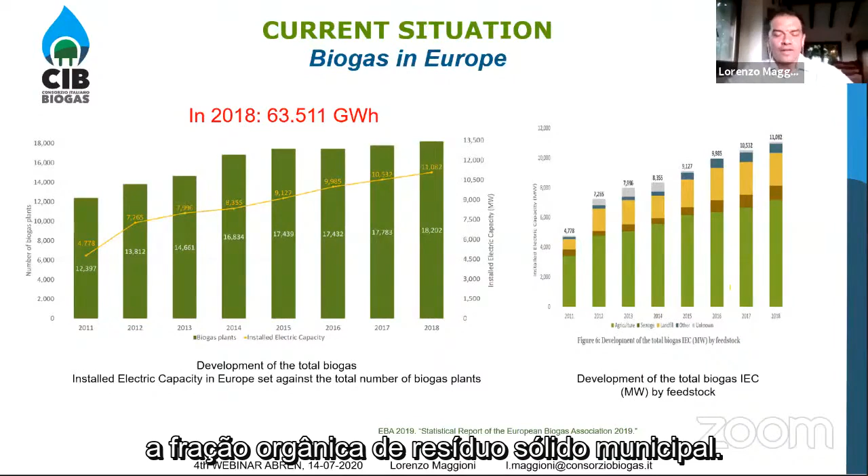First of all, I want to give you some numbers about biogas and biomethane in Europe, and after, I will focus my presentation on the situation we have in Italy. In Europe, at the end of 2018, we had more than 18,000 biogas plants with an electric installed power of more than 11,000 megawatt. The total production in 2018 was 63,500 gigawatt hours. In order to produce this huge amount of renewable electricity, we use agricultural residues, and around 70% of the total production of biogas is made thanks to this feedstock, agricultural residues and energy crops. The second most used feedstock is the organic fraction of municipal solid waste.

For biomethane production, exactly as is happening for electric energy production, we are using most of all agricultural residues. In this case, it is forbidden, it is not possible to use energy crops. In order to produce biomethane in Europe, you need to use only agricultural residues, agricultural byproducts. It is also possible to use the organic fraction of municipal solid waste.

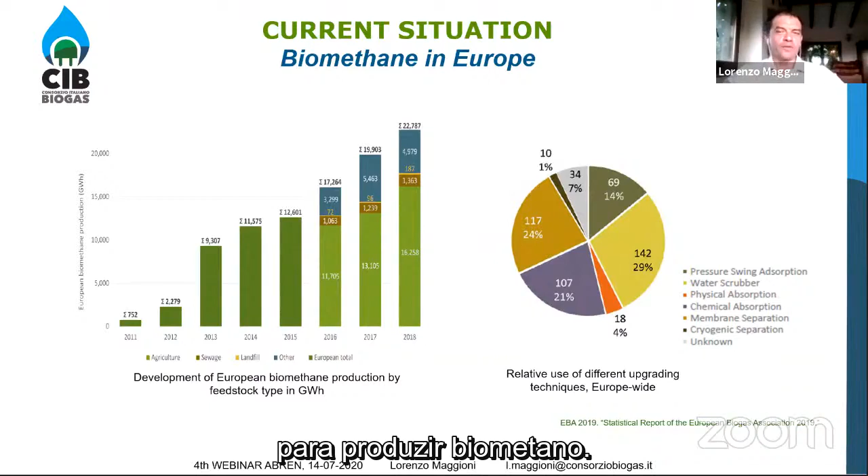So for the moment, we have not a best technology. It's possible to use all the technologies to produce biomethane. Now I want to start to talk about biogas and biomethane in Italy. Italy is the second market after Germany. We invested a lot of money, more than 4 billion euro in the last 6 years.

We have more than 1,800 biogas plants with a total installed electric power of more than 1,300 megawatts. It's an equivalent of 3 billion cubic meters of biomethane per year. Thanks to the biogas sector, it's important to stress that we created also a lot of green jobs. We estimate around 12,000 green jobs.

Talking about biomethane, now I want to explain what is happening in our country. For the moment, in Italy, we have no more subsidies for the production of electricity. In September, and only for a few months, we will have the opportunity to submit new projects, around 100 new projects.

We are waiting for a new decree that will allow us to start again with renewable electricity production thanks to biogas. So in September, we will have the opportunity to build only small plants with a maximum size of 300 kilowatts, and only fed by manure from cows, from pigs, and from other animals, adding a small quantity of other byproducts. But the total amount of these new biogas plants will be very, very small.

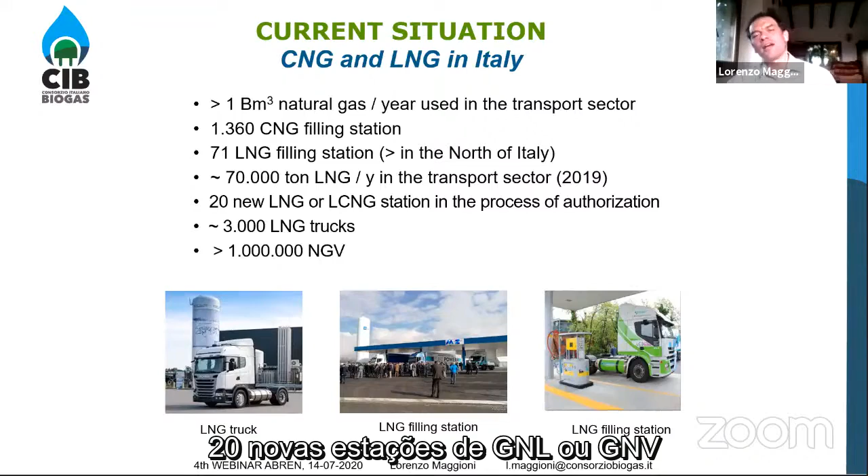We have around 1,360 CNG filling stations and 71 LNG filling stations. But 20 new LNG or LCNG stations are in the process of authorization. So what about biomethane? In March 2018, our Italian government published a really interesting law that introduced subsidies for the production of biomethane. The maximum biomethane production with subsidies will be 1.1 billion cubic meters per year.

And it's important to stress that in order to achieve these subsidies, you have to demonstrate that the total amount of biomethane you produce is used in the transport sector. How is it possible? You can show it by injecting biomethane into the natural gas grid, and then, thanks to a mass balance process, it's possible to transport the biomethane in a virtual way all over Italy and to sell it in the existing CNG filling stations. It's possible to compress the biomethane, transport it by trucks and sell it in filling stations, or it's possible to liquefy the biomethane and sell it in LNG filling stations.

The Italian government gives you really interesting subsidies in case you build a new filling station. You receive 0.6 million euro for each new filling station you build, and you receive 1.2 million euro for each liquefaction unit you build. It's possible to add these two different subsidies together. So in case you build a new filling station and a new liquefaction unit, you receive 1.8 million euro. And in addition, you will also receive the subsidies for the biomethane production.

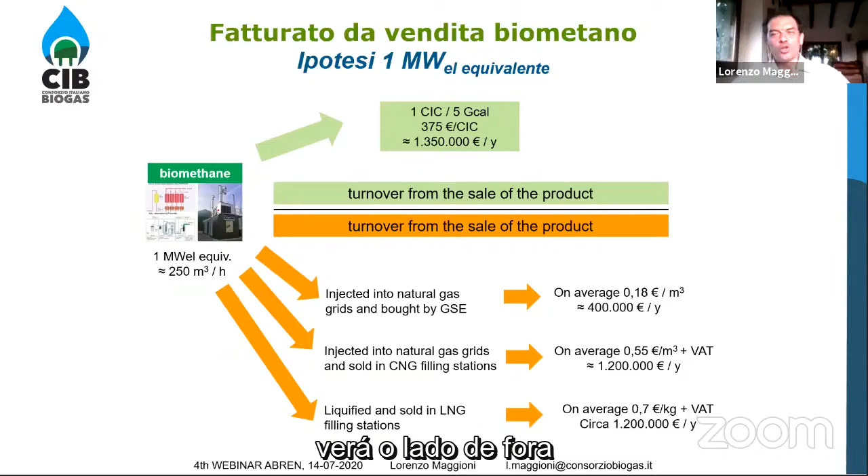So the total turnover per year will be a minimum of 1.7, 1.8 million euro to a maximum of 2.5 million euro in case you sell your production directly to the final customer. And it sounds really, really interesting. And remember that this example is linked to a plant with the size of 1 megawatt equivalent. But in the next slide, you will see the average size is really bigger in our country.

The biggest plant is a plant with a size of 3,750 cubic meters per hour, but really they are doubling the capacity, and I think Mr. Moretti has already doubled it. Yes, I think Mr. Moretti will explain something more because his company built this upgrading plant. Also, other plants have a very large size. There are other plants with 2,000, 3,000 cubic meters per hour, and we have, unfortunately, for the moment, only 2 plants fed by agricultural byproducts.

One based in Emilia-Romagna region is a company named Caviro, that is the largest Italian producer of wine. So they have a 2,000 cubic meter per hour plant, and another plant is based in Lombardy region with a size around 600 cubic meters per hour. It's really important to stress also that in some of these plants, they are not only producing biomethane, but they are also producing carbon dioxide. In the largest plant in Montello, they are producing a very huge amount of carbon dioxide. But Mr. Moretti will explain better.

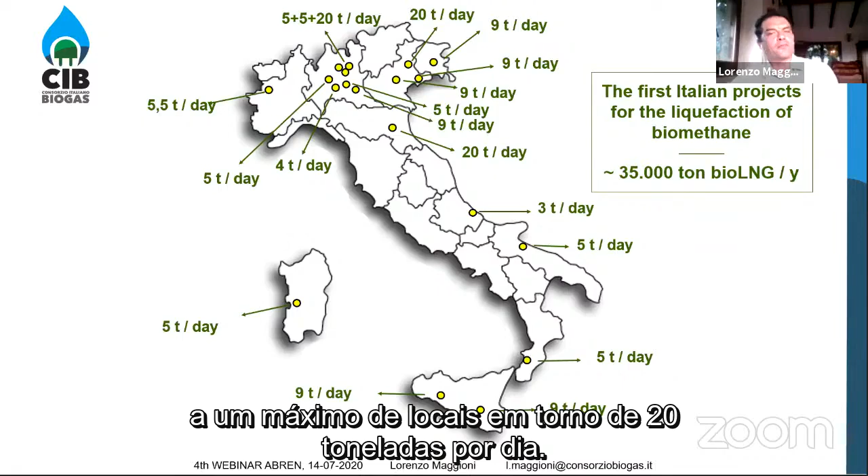Now I have the last 4 or 5 slides. One case study. Cooperativa Speranza is agricultural, it is 5 farmers that are working together, so it's a cooperative. They own 2 existing biogas plants, each one with the size of 1 megawatt electric. They are starting to produce the first Italian kilogram of bio-LNG. They will use 100% agricultural byproducts. They will produce 5.5 tons per day of bio-LNG.

It's interesting to show also that they are producing a lot of heat and they are selling the heat to a cancer research institute. So using the heat coming from the biogas plant, the research institute spends less money and creates less air pollution.

How will they use the bioenergy? They signed an agreement with a company whose name is Maganetti. Maganetti SPA is the owner of a large fleet of trucks. They have already bought 42 LNG trucks. So the Maganetti company will start to use 100% bio-LNG in their LNG heavy truck fleet.

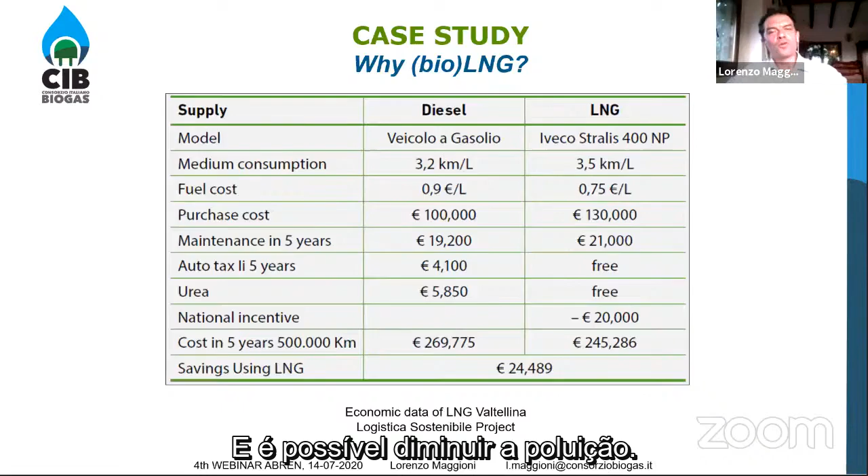In the next 2 slides, I will explain why they decided to use LNG and not more diesel. Using LNG, it's possible to save money, around 5,000 euros per truck every year, and to decrease pollution. In case you use fossil LNG, you decrease carbon dioxide emissions by 15%. When they start to use bio-LNG, the percentage will increase a lot - it will be possible to demonstrate a decrease of more than 90%.

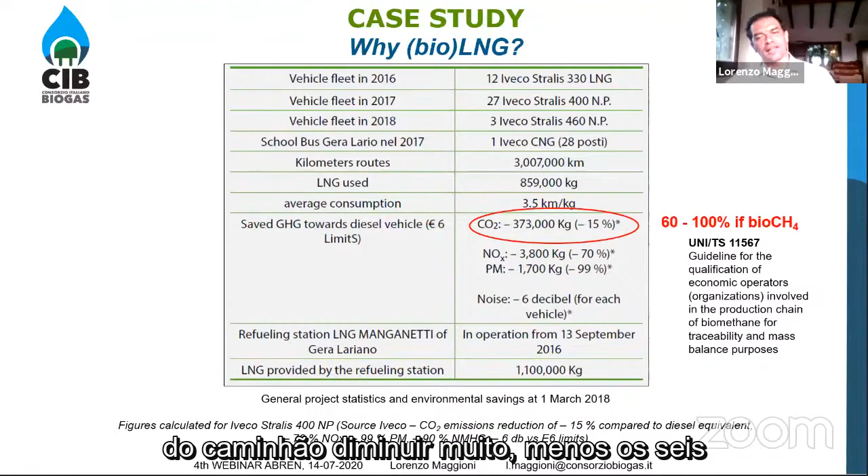Using LNG or bio-LNG, it's also possible to decrease a lot the quantity of NOx in the atmosphere, by less than 70%, and particulate matter by less than 99%. Also the noise of the truck decreases a lot, by less than 6 decibels for each vehicle.

This is the alarm that is saying I have to stop my presentation. Sorry, but I have the last slide.

Thank you for your attention, and obviously at the end of the presentation I will answer your questions.

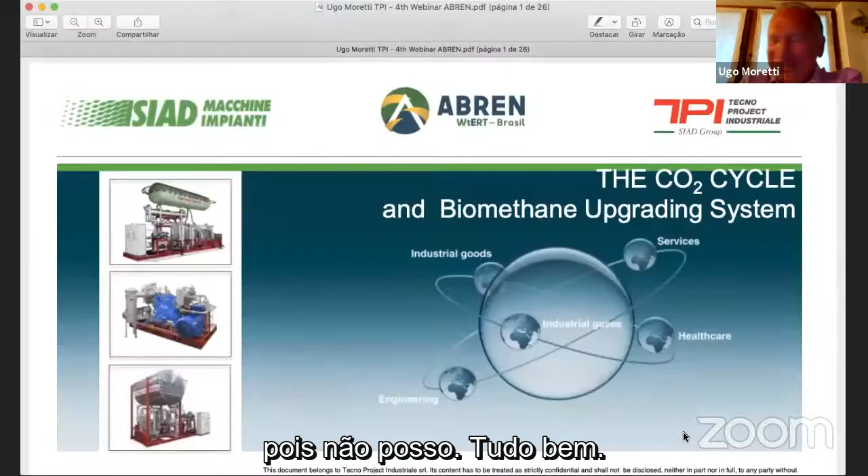Our company is not coming from the biogas field, but is a gas company specialized for 40 years in purification and production of CO2, and the separation of CO2 from any kind of mixture, including, of course, biogas in recent years. Therefore, we don't start from technology like other colleagues from biogas technology, but from gas treatment technology. We also belong to a company which is a major producer of gas in Italy. Therefore, we use this company for testing our technology on CO2 and its applications.

Even if our experience in CO2 extraction is mostly based on traditional solvents, such as amine or hot potassium carbonate, we decided to move to membrane mainly, and still amine, after having selected all the technologies for gas separation and gas purification. We know PSA from our hydrogen plants, oxygen plants, and nitrogen plants, as well as membrane technology that we have used since ever for nitrogen production. Therefore, looking at all the technologies, we really decided to choose only two technologies.

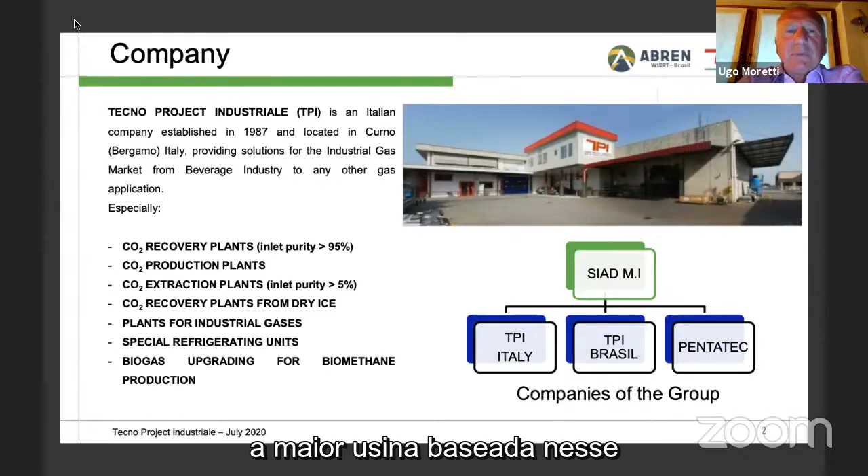This allows us to recover CO2, as we did in the largest plant we have for organic waste biogas treatment, which is the most difficult due to impurities. We installed the largest plant based on that system in Montello, which is actually producing 4,500 cubic meters per hour of biomethane.

Last week, the first of the next 3 lines was started, up to a total amount equivalent to the actual one. Therefore, within a couple of weeks, it will produce 9,000 cubic meters per hour of biomethane and more or less 10 tons per hour of CO2, food grade. The actual plant has produced, in the last 2 years, 40,000 tons per year of food grade CO2.

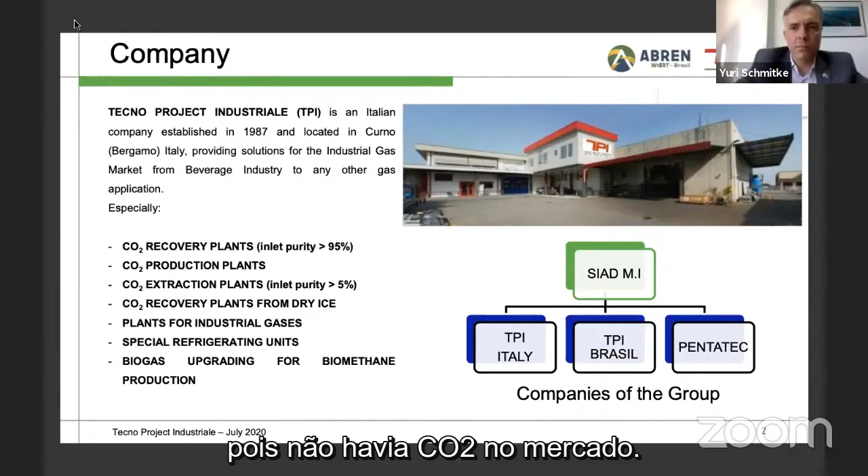That has solved the problem of lack of CO2 in Italy and also in all of Europe in the last 2 years, where there was a shortage of CO2. Last year, 2 breweries in England closed because there was no CO2 on the market. It's incredible, but now this is one of the main sources.

Therefore, we have the advantage of using our CO2 recovery plant to also recover the last methane contained in the off-gas. Normally, the 3-stage membrane system has the advantage that you can regulate the percentage of CO2 in the methane to be injected into the grid or sent to LNG or CNG. With this technology, we can easily recover the CO2 because the residual methane can be separated in our plant.

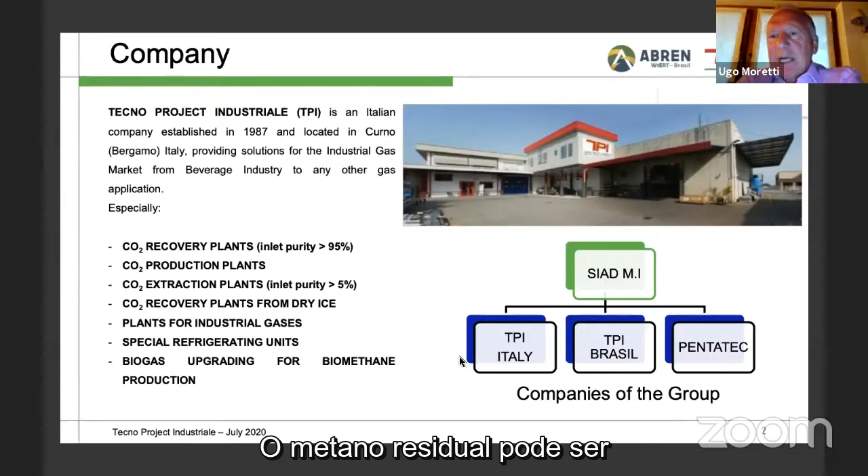Thanks to that, now the Regione Emilia is imposing, for biogas from organic waste, the installation of a CO2 recovery system as well, since methane has a greenhouse effect 20 times greater than CO2. In this way, we totally reduce any emission of methane because we recover it in the CO2 purification process and send it back to the system. Therefore, we do not discharge any methane.

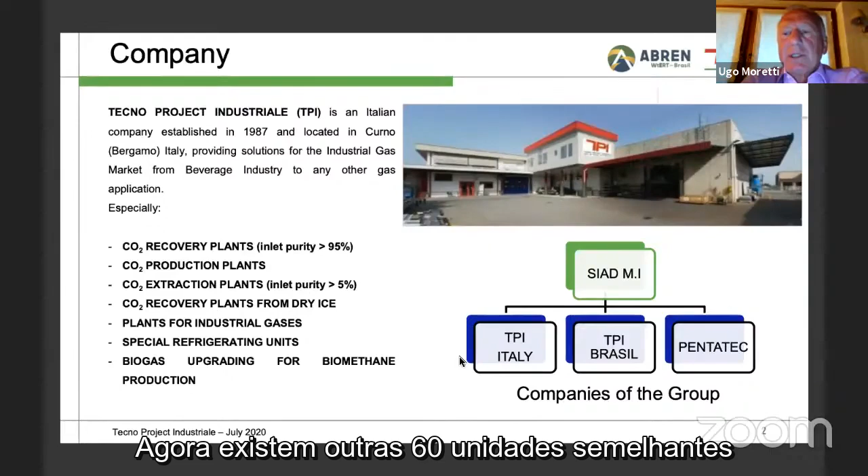This is what is happening in the huge plant in Montello, which is the largest in the world, actually. Now there are other 60 units in a similar installation by a company called SESA, SESA and Biomethan, that has, each one, a capacity equal in total to Montello. That means 15,000 cubic meters per hour of biogas treated, which is the largest, but spread across 2 separate sites, not in the same plant like in Montello.

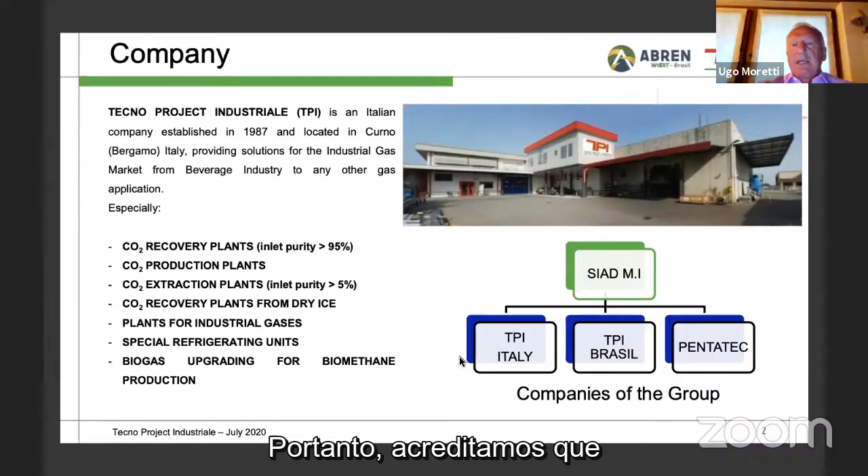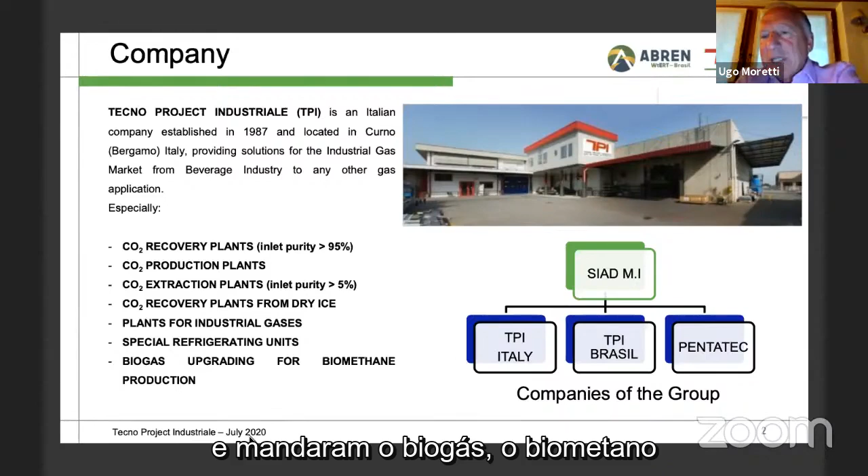We believe that even though in Morocco we installed just the first biogas plant based on membrane technology, at Delta Holding, a company that makes sugar, they installed the biogas upgrading plant based on amine just to produce CO2, not methane. They sent the biomethane to the boiler again, but we recover CO2 from their main production plus from purification of the biogas. These are the applications we are working on now.

In addition, the quality of the CO2 that we obtain is absolutely food grade, complying with EIGA, which is the guideline also used for Coca-Cola, and according to E290, the Italian rule for food grade, as well as halal certification. All of this has been approved for all the applications of the CO2 we recover.

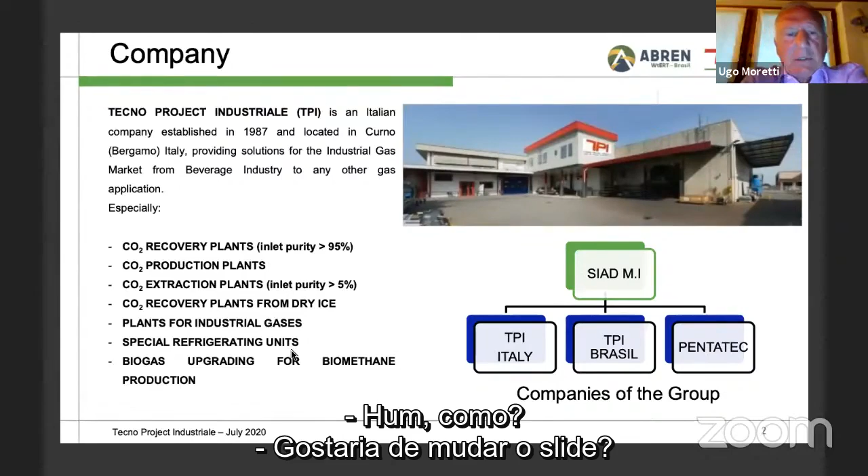Mr. Ugo, you want to change the slide? Yes, of course. Go. This is just the application of biogas. Go. Yes, this is mainly on breweries. Okay, go. CO2. Okay.

These are only the breweries, in the breweries, where there is also biogas present, but we have not yet applied, we're not yet convinced to recover biomethane from the biogas that is present in all the breweries. In InBev, in Grupo Modelo, we just collect and pre-purify, but we don't produce biomethane.

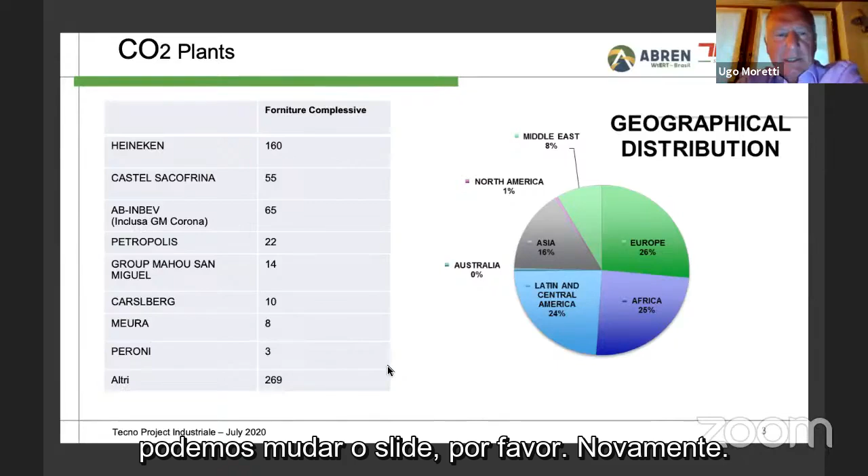Then we can change the slide, please. Again, go.

This will allow us to avoid this, because it seems strange, but 100,000 tons per year are extracted from underground in Italy for the market, only for the Italian market.

In Europe, there are several CO2 recovery plants from deep wells just to feed the market that can be absolutely satisfied by the biogas, by purification, as a byproduct of biomethane. CO2 can be recovered everywhere very easily. Of course, with the technology, with amine or potassium carbonate or membrane, CO2 can be easily recovered and close the absurd recovery from underground.

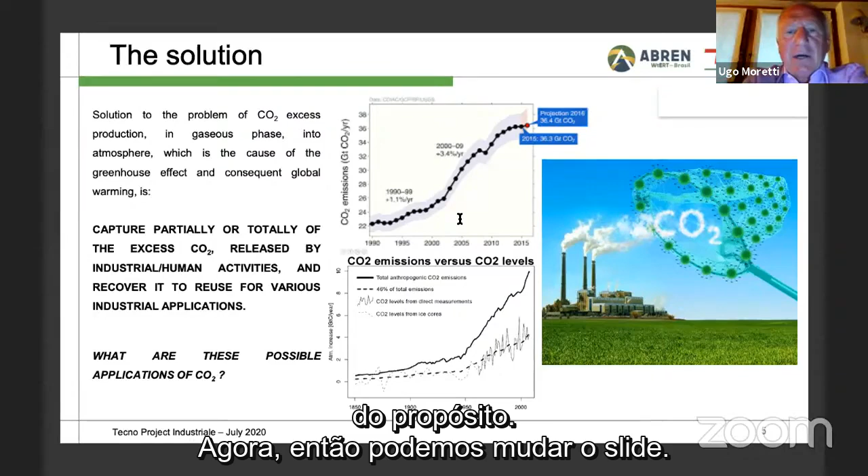Then we can go. We are talking mostly about CO2. Now, what do we do with all this CO2? There are so many applications. These are one of the several applications.

Several applications. One is dry ice, in the United States is well used for cooling, also for fish cooling, and CO2 is freezing and also bacteriostatic. Therefore it's the best for conservation at low temperature of foods. As liquid it is cold energy.

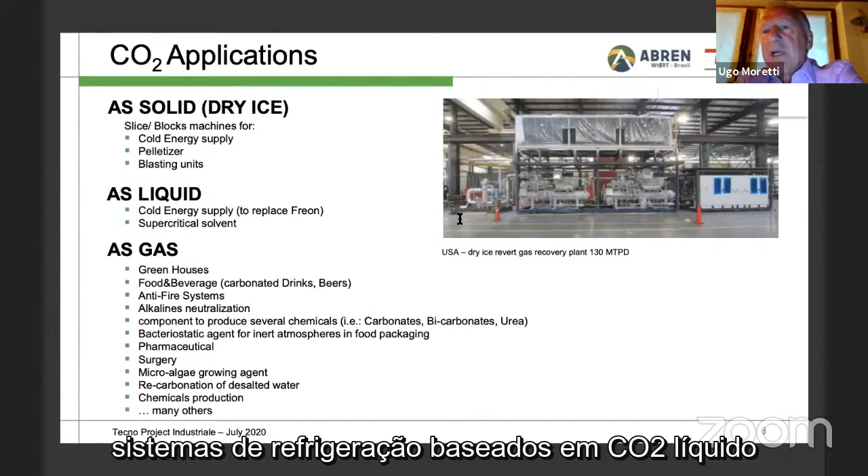There are now growing refrigeration systems based on liquid CO2 instead of freon. Then as gas, for greenhouse for instance, we supplied also 3 CO2 recovery plants on biogas upgrading to one of our most important competitors using the same membrane. Therefore we applied them, but we sold the CO2 also, all dedicated to greenhouse feeding.

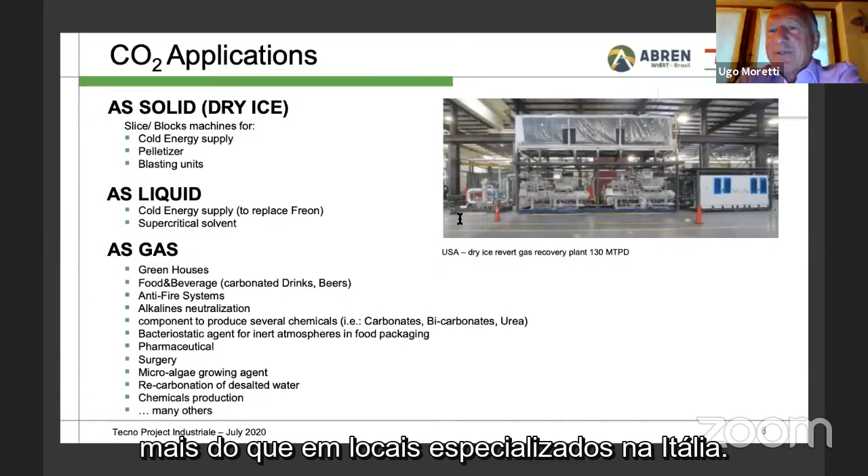In Holland, there are so many greenhouses. They are producing tomatoes now, more than some part specialized in Italy. I don't know how the taste is, it's not like Italian taste, but anyway, it's in this greenhouse with the CO2. You know that in the greenhouse the growing of vegetables is so strong.

Therefore, this kind of CO2 anyway has been demonstrated, with international publication, that it can be used for any kind of application as the other CO2, of best quality.

Go again, microalgae, and then these are other extraction plants. We have an extraction plant. The CO2 is also used for desalination, for recarbonation of desalted water, one of the applications.

One of the desalted water cases is Saudi Arabia, where there is no source of CO2. Of course, no breweries, no distillation, no ethanol. Therefore there is a lack of CO2. Therefore, we burn something to produce CO2 that is necessary to recarbonate the water, the desalinated water.

And of course, for instance, food waste can be a good source of methane. Of course, this country does not need methane, but needs CO2. We have just sold to Puerto Rico an important plant that is producing biomethane, but the real necessity, really they give more value to the CO2 recovery from the biogas. That seems absurd. Okay, go.

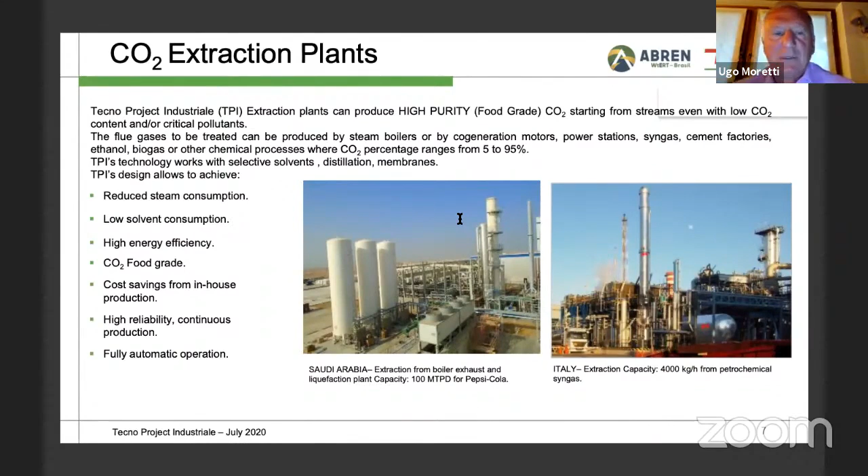Amine system in Italy is not agreed, but just because it's a chemical, while in the petrochemical industry it's used to recover CO2 or to collect CO2 and to sweeten the gas. But in this field, there is difficulty to apply amine as a technology, which has the advantage of having very good selectivity, and can separate perfectly, without any waste, without any loss, CO2 and methane exactly in two. This is a very highly consolidated technology.

Now, the technology of membrane, the advantage of membrane is just that it's a new technology. This is why we look for that. While the other technology is consolidated, there is nothing more to invent. And the optimization is practically impossible - for amine there are new solvents, but more or less they are the same as amine. All the other technologies are consolidated, no improvement.

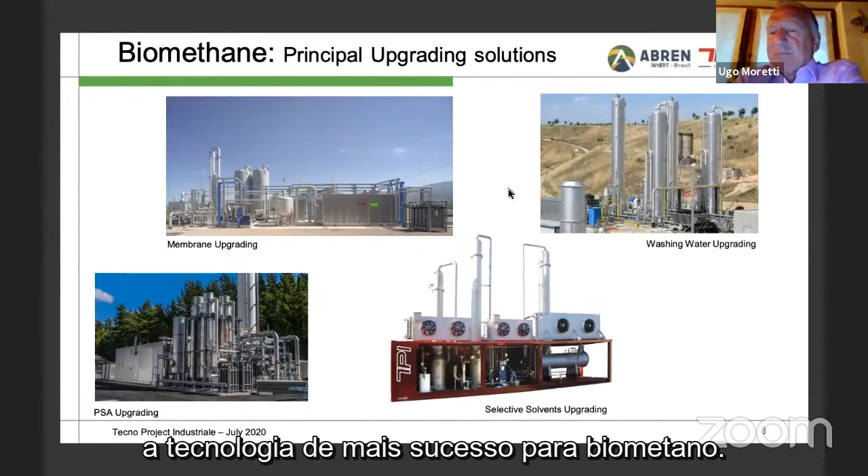Therefore, we expect that the membrane system will decrease in price and increase in performance, so it will be more and more applicable. It will be the most successful technology for biomethane. This is one of the membrane packages, quite large, one of the 6 supplied to SESA. Now a plant like this has half of the membranes that you can see in these pictures.

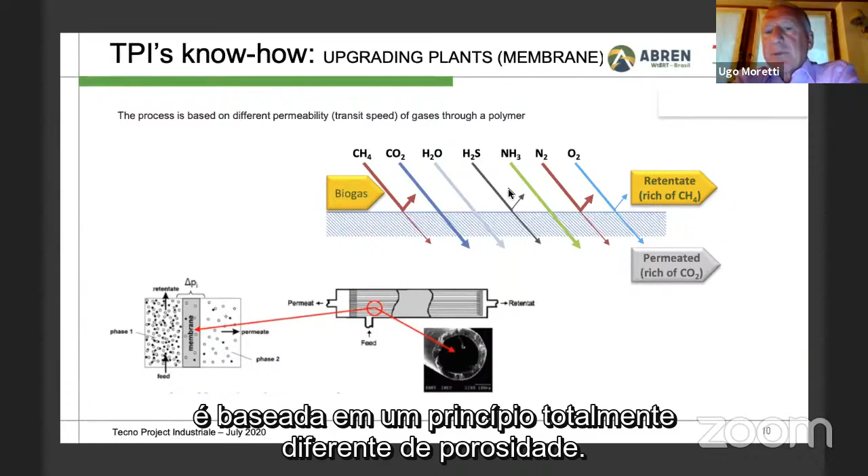Then go. This is how the membrane operates. The system is not a filter. It's like a filter, but it's not a filter, because it's based on a principle totally different than porosity. And this assures that there is no possibility of viruses or bacteria passing through the membrane and going to the CO2. This has been demonstrated because the membrane is a dense membrane, not a porous membrane.

We can go. This is how each membrane looks. Membrane is really quite difficult to manufacture, it is really high technology. It does not look like high technology, but the fabrication really is. In fact, there are very few producers. Now this is just very simple.

In the case of biogas, it more or less has the same components, except in the FORSU, but the type of components and impurities are always the same. The difference is the quantity of impurities present in each biomass. The worst is FORSU, organic waste that has a lot of VOC, volatile organic compounds, and these damage the membranes, but, except water, the other technologies are also damaged by VOC. Therefore, our experience starts from the worst source, unfortunately, but allows us to set up exactly the technology.

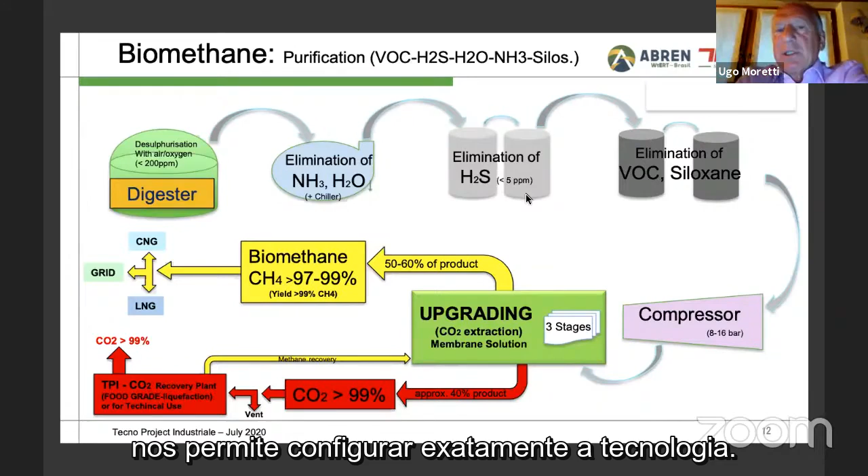Now the H2S is present everywhere. VOC are mostly present in organic waste. Siloxane is mostly present in landfill biogas. It means that TPI has the possibility to treat the biogas and make the complete chain, now also the liquefaction. We have upgrading with the separation of biomethane and CO2, make CO2 food grade, and the possibility to produce also LNG, with purification over 99% of methane and the removal of the last CO2.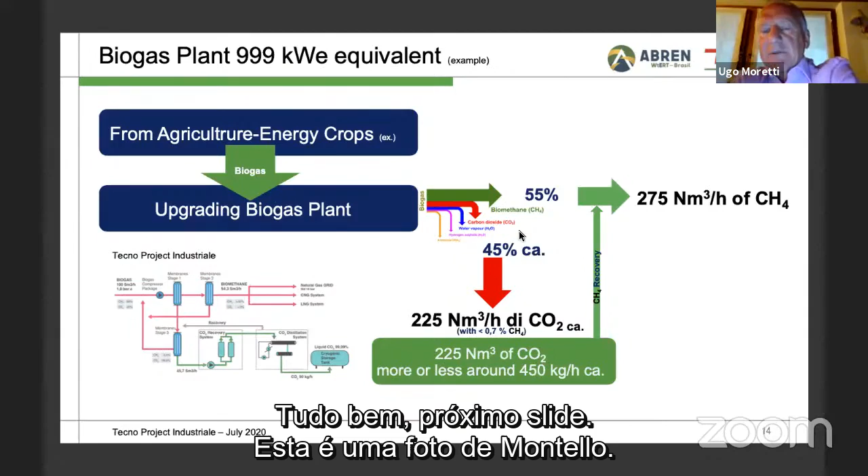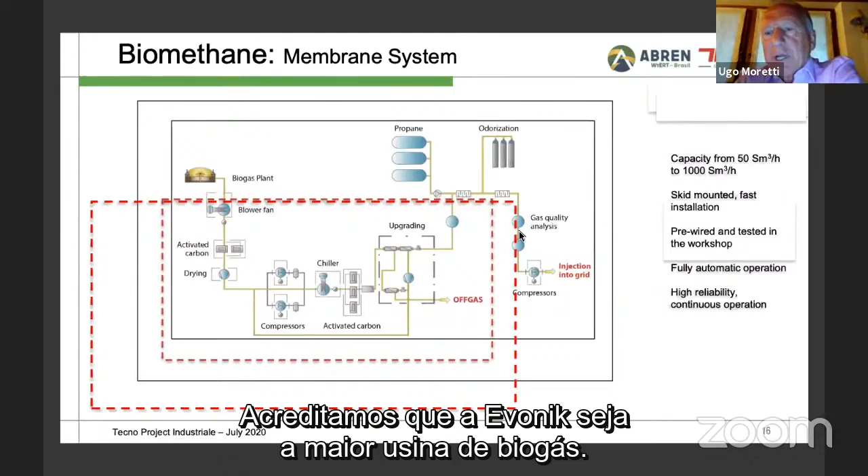Okay, we can go. This is a picture of part of the Montello plant, which is very impressive now. It is one of the 350-ton liquid CO2 storage tanks and one of the first lines. You can see only 3 lines now. The first plant is 5 lines, and now there are 3 other lines, each one treating 2,500 cubic meters per hour of biogas. In total 15,000, which we believe for Evonik is the largest biogas plant based on membrane in the world.

This is again the typical membrane system. Let me say that the membrane system is relatively simple because it's composed of pre-purification, which is very important, and just a 3-stage membrane system that is really simple. What we found after 4 years of operation is that they are not as delicate as they seem. We were concerned in the beginning that the membrane seemed delicate against oils. That is true. But apart from the pilot that we destroyed a couple of times, with good pre-treatment we have not had any problem after practically 3 years of operation, 8,500 hours per year.

In the Montello plant, we have not had any damage from the impurities. This is the system, very simplified. It means the biogas compressor sends to the first stage membrane. From the first stage membrane, the permeate, which is CO2, goes to the third stage. It means that the CO2 is passing through membranes two times. Therefore, it's impossible that some bacteria can pass to the CO2.

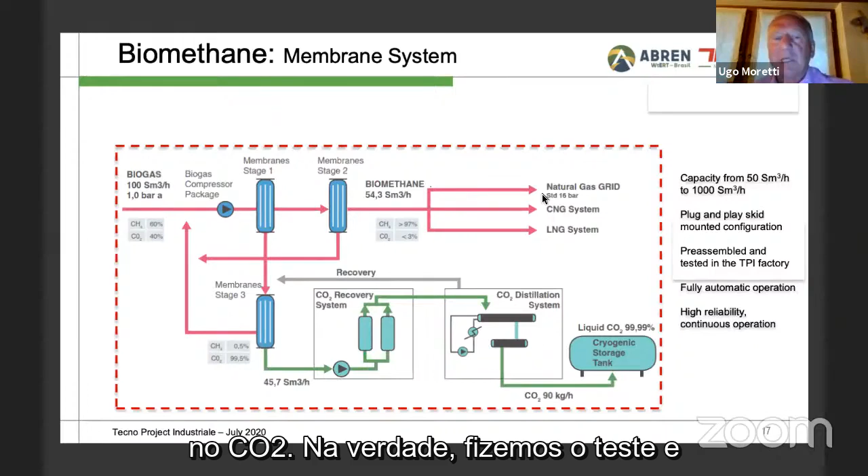In fact, we did the test and the analysis on bacteria, virus, others, organic, also on DNA for pork, because there was also a problem of qualification of CO2 for other applications. And we analyzed the CO2 directly before the treatment in the CO2 recovery plant, after the membrane, where there was nearly only part of the methane, residual methane that we remove in the stripper in the CO2 distillation system. We didn't find any trace of bacteria or virus

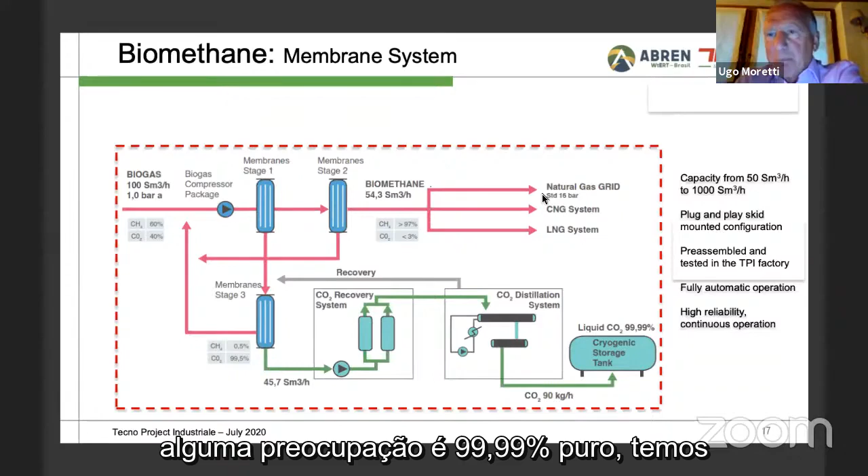or anything else. Therefore, the CO2 in this case, even if the provenience can give some concern, is 99.99% pure. We have the analysis done by gas chromatograph and mass spectrometry, according to all the rules, all the food grade rules, also Coca-Cola food. Okay.

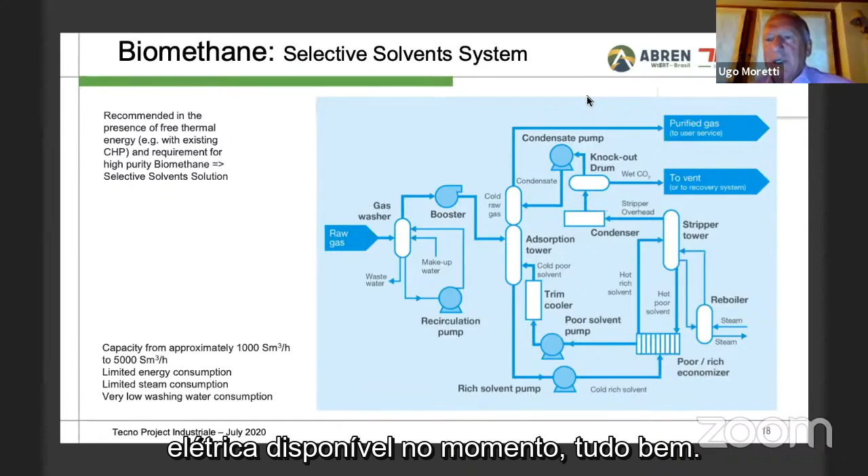And let me say that from the point of view of consumption, here there is a thermal consumption, while in the membrane there is an electric power consumption. You have to evaluate what is more available. Okay.

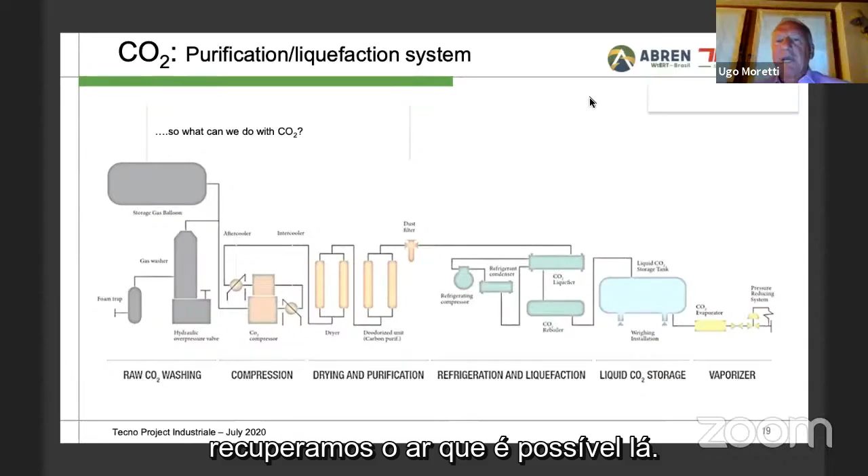This is a typical purification liquefaction system. This is the schema that you can find more or less identical in a brewery or in other fermentation or recovery plants. Therefore, for us, CO2 recovery is an absolutely consolidated technology, nothing to invent. The advantage here is that from the stripper of liquefaction, we can recover also the last methane, while in the brewery we recover the air. In this case, we recover the methane that we put back, so the loss is practically zero.

Okay, can go. This is ours in the last years, because Italy started only in the last few years, and as you see, we have installed so many plants, and the number of cubic meters of biomethane produced by our plants is really a lot. Only SESA Group is producing 9,000 cubic meters per hour of biomethane, 9,000, 10,000 because there is also one more, and also Montello next week on the 27th.

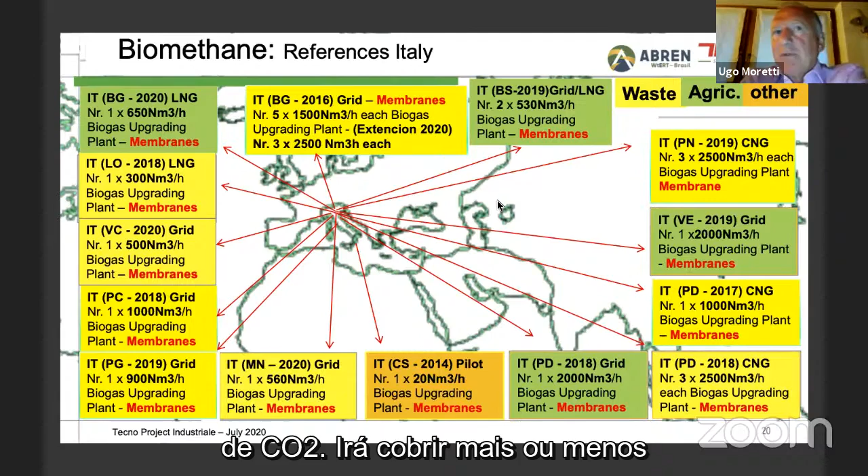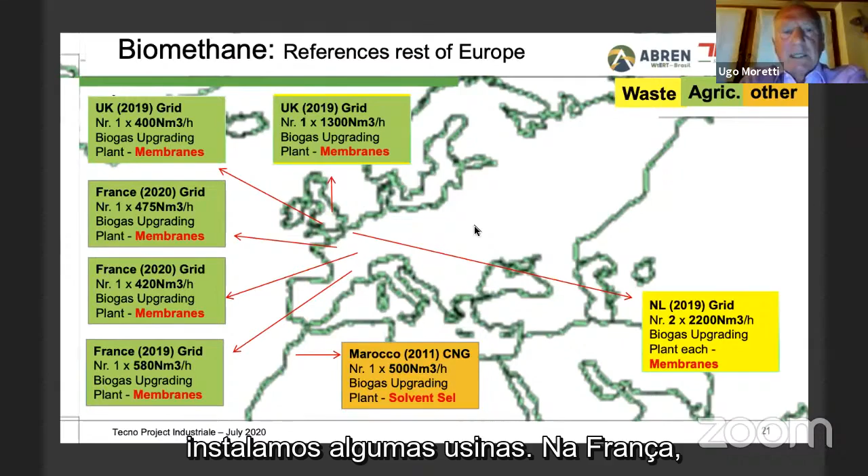Now, because the market in Italy is booming, but it will finish, we move also into other countries, and in England we already installed some plants. In France we are starting. One is already installed, two under delivery. In Morocco there is one, but it is an old one, from 2011, and now there is also quite a large plant in the Netherlands. Two plants of 2,200 cubic meters per hour each.

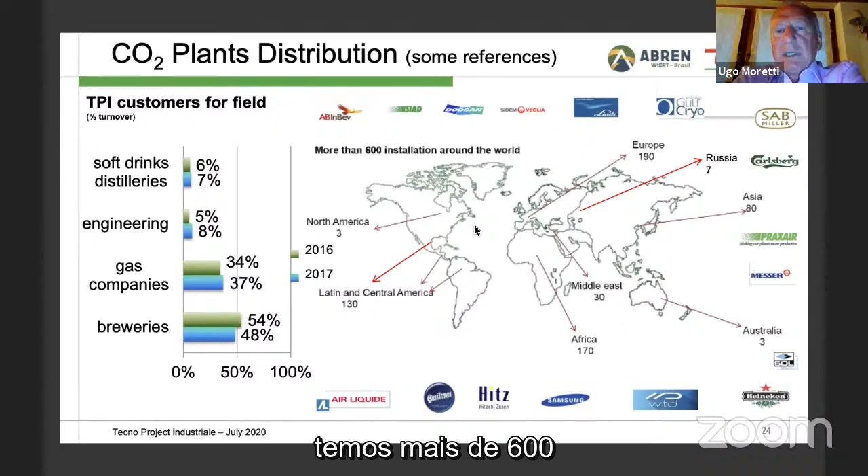This is the distribution of our plants. We have more than 600 CO2 installations around the world, because our company is 40 years old in CO2, while for membrane, for biogas, we have only 6 or 7 years, but we expect that we will reach these numbers in a short time. Okay, thank you. These are some pictures we realized in our workshop.

Okay, thank you. Thank you very much, Ugo, for this presentation. It was excellent to know about your membrane technology, the biggest membrane plant in the world. And it is a huge company with a lot of knowledge that can share this information in Brazil. There is a huge market to improve.

And next, we'll talk about the conversion of diesel or gasoline engines into dual fuel CNG and LNG. Mr. Roberto Roasio, from Ecomotive Solutions, Italy, specialized in natural gas and bio-natural gas, expert in applications for the automotive and industry field, has a particular focus on bio-LNG and liquefaction technologies.

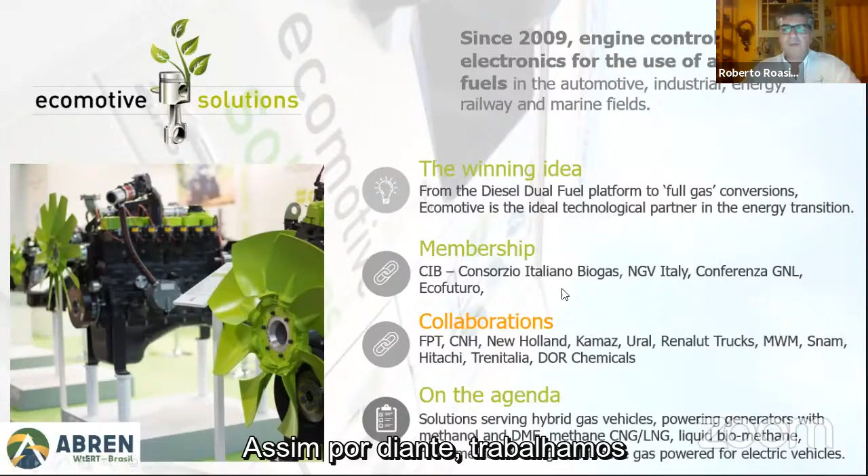Ecomotive Solutions has been working for 12 years with the most updated technologies to manage engines, both diesel engines, gasoline engines, and so on. And we are working with big names in the field of automotive or industrial. At the moment we have open projects with FPT, CNH, New Holland, Kamaz, and Hitachi, and so on. Our role is always to design solutions related to the engines. Engine work is definitely our core business.

Now, I wish to introduce you to one of the bases of our technologies that was there already 12 years ago, when not so many companies in the world were speaking about the final use of natural gas on diesel engines. Because in diesel engines, usually you can't burn natural gas, because natural gas has a really high ignition point. So in a diesel engine, where you don't have a spark to ignite the combustion, you can't reach the self-ignition temperature of the mixture of air and natural gas.

Because of that, instead of using a diesel engine, many companies are working with Otto cycle engines, so spark ignited. And this has been really popular for a long time. The first applications were on buses or cogeneration systems using big engines with a spark, like a big gasoline engine converted to natural gas.

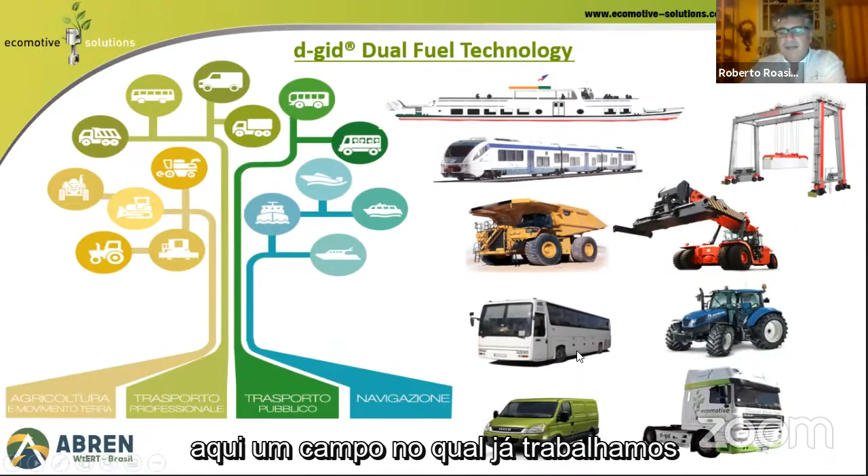Anyway, the field of application of dual fuel technology is really huge. Any of the pictures that you can see here are fields in which we already work with our technologies. And the advantage of having a diesel that also uses natural gas is very nice, because with the diesel dual fuel, you can work either with this mixture of diesel and gas, or you can use the diesel as the original vehicle.

So in any market where the natural gas refueling infrastructure is not well developed or is ongoing, the use of dual fuel is really a very nice way to start up the market of natural gas in transportation, because you can start with your tank full of natural gas, and then when you finish the gas and you are far from any service station, you can simply switch back to diesel, 100% diesel, without any problem of power or different style of driving. And you can finish your daily work without any trouble.

So the main advantage of this technology is that it is not a mechanical technology. We don't touch the engine mechanically. We are only adding an injection system for natural gas. We are only adding a new ECU that works together with the original ECU in order to manage the energy inside the engine and decide how much gas to put in and how much diesel to take off.

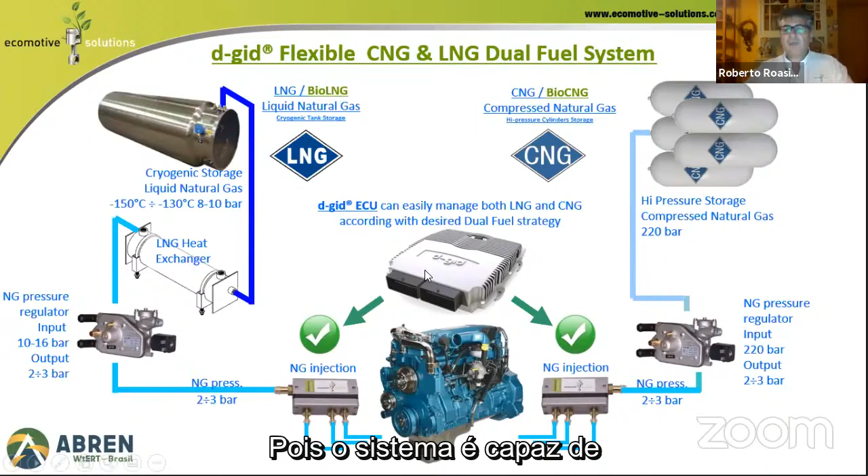So we have been ready since the beginning to use any kind of natural gas. We can use compressed natural gas or liquid natural gas, cryogenic fuel, in the same way, because the system is able to manage both systems without problems.

But when you are cooling down the gas, and you bring the gas below minus 162 degrees at atmospheric pressure, you can have a reduction of volume of 1 to 600. So it means that what was the volume of CNG cylinders, it is less than 2 times. So it is really a profitable way to store more energy on a truck or any vehicle.

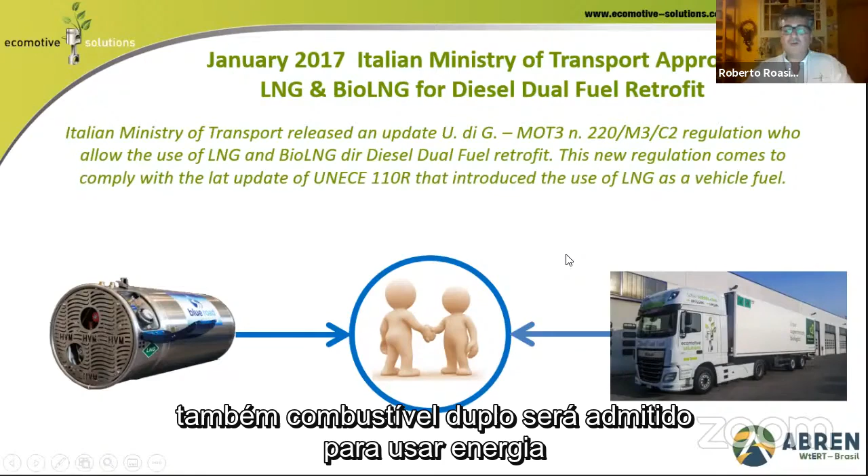Since 2017 in Italy and in Europe in general, also dual fuel will be admitted to use LNG. And starting from that moment, you can see here a picture in a service station in the FAR 2017, where you can see already how many vehicles are using liquid natural gas as a fuel in Italy, and the majority of them are with dedicated engines, from OEM production like Iveco, Scania, and so on. But there are also, like the first one with dual fuel written on, dual fuel systems that are using LNG as a fuel.

Then we have to speak about our project together with the CIB, the consortium of Italian biogas producers, about the use of biomethane as a fuel. The process of producing biomethane is now well known to you. So starting from feedstock or from any organic waste, you can create a biogas, and then the biogas could be purified with an upgrading system.

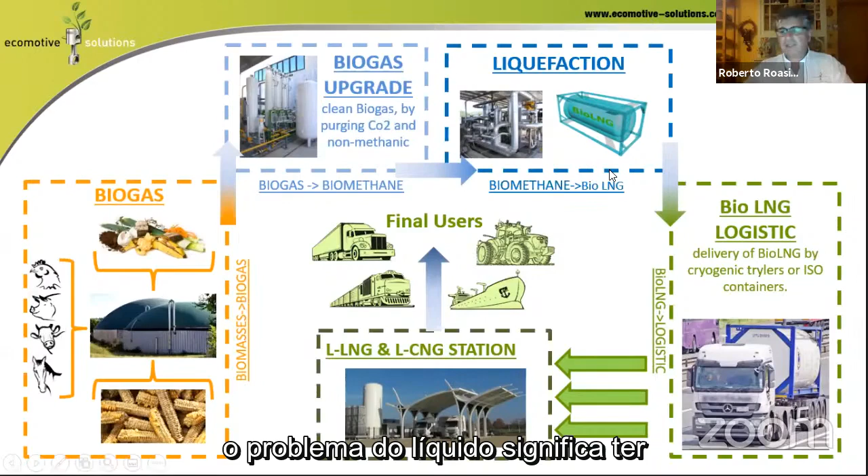And then our philosophy is to not stop with the gaseous product, but convert the gaseous product into a liquid product, because the liquid product means to have a capability to have logistics. So I can transport the liquid natural gas and bring it to a station everywhere, even if the station is not connected to the grid. And so this reduces the dependence of natural gas on the pipeline. And this is really great. And this is good on the side of the environment, but also on the side of the money, because this multiplies the possibilities.

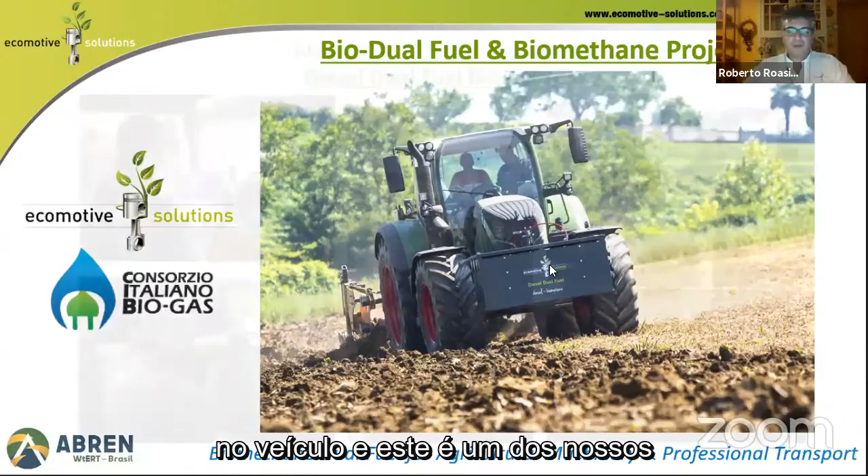We start also considering agriculture as a big potential for the conversion from diesel to dual fuel. You can see that we invented some solutions to store CNG on the vehicle. And this is some of our experiments. And this is an official project that we have with CNH, with New Holland, to store more fuel on board. And this is a truck that we presented in Russia, because this will be produced by CNH in Russia. And we presented this last year at the St. Petersburg Gas Forum. And this will be really a popular solution in the near future.

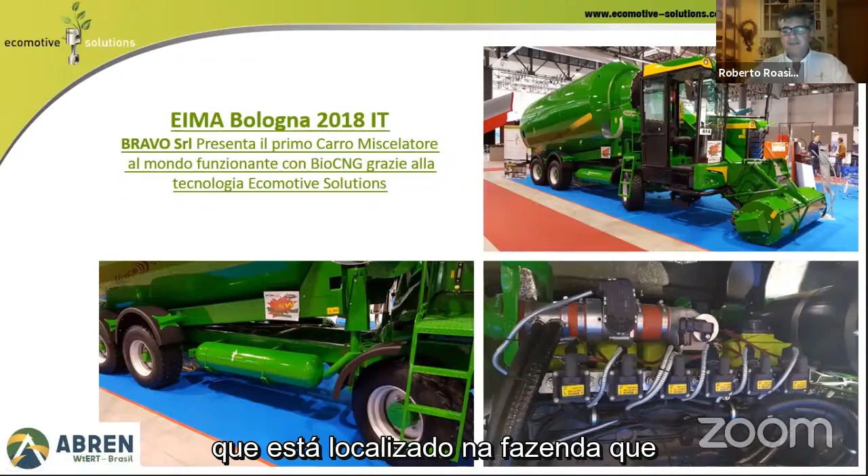We are also converting vehicles to full gas. This is a system that produces the food for animals. In the beginning it was a diesel, but now we converted this diesel to full gas. So this is an Otto cycle engine, converted in order to let the vehicle use biomethane that is there in the farm that was producing this product. And this is one of the first producers of biomethane and liquid biomethane in Italy. And you can see that now this vehicle can run in the stable without making pollution, because it is running on bio-natural gas. This is another option, a telescopic system that can run only on compressed bio-natural gas, of course, in a farm that is already using this product as a fuel.

And then already in the FAR 2015, we also tried to use LNG, so liquid natural gas from a biologic source, on a tractor. And let me say, this is the next future that we are looking for.

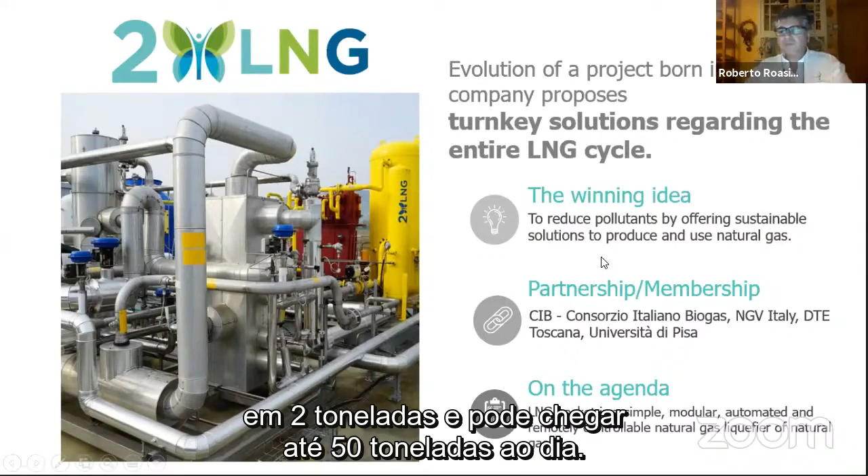We love so much the use of LNG that we started also producing LNG with our own company. The name of this company is 2LNG, and this company produces a small liquefaction system that can start from 2 tons up to 50 tons per day. And this is also one of the first companies in Italy to produce some liters of LNG, and the project started in 2015. And now we have a product that is ready for the market. It is a product that, thanks also to many cooperations, now will be one reference point for the liquefaction of biomethane.

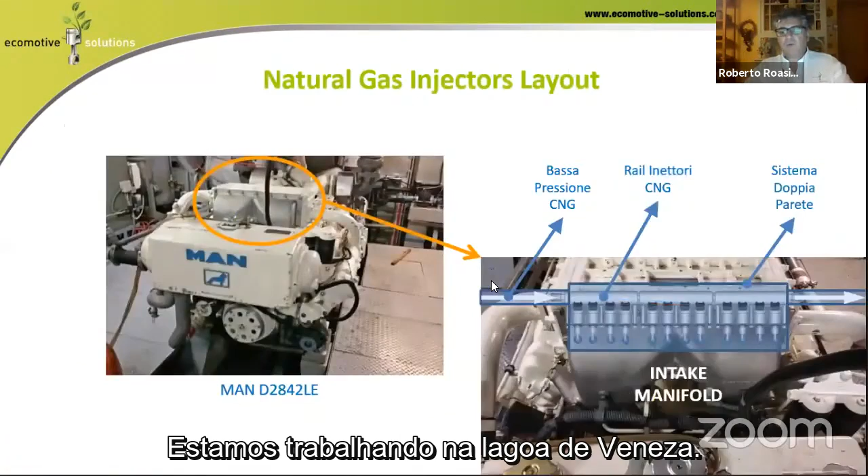Then we are working in the Lagoon of Venice. This is a project for DHL, and we converted this engine to work with natural gas, so with less pollution in the Lagoon of Venice, which is really sensitive to emissions.

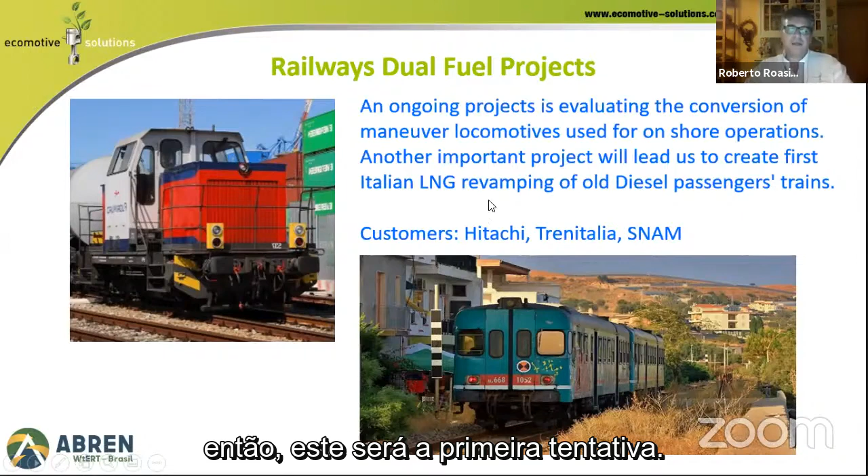This is a project we are leading together with Hitachi and Trenitalia, the owner of the railway in Italy. We still have many old trains working with diesel, so now we are converting the first one into an LNG gas train that works only with LNG instead of diesel. We are converting all the diesel engines to 100% natural gas, and this will be the first try in Italy, to later convert all the fleet of Trenitalia.

Then we are also working in the harbors. This is a reach stacker that works to move containers, and in 2014 we already used LNG in dual fuel to convert this truck inside the Green Crane project of the TEN-T EU project, and we got really good results. In recent years we were also in Germany, in Duisport, where we were able to design the same solution, but in a land port.

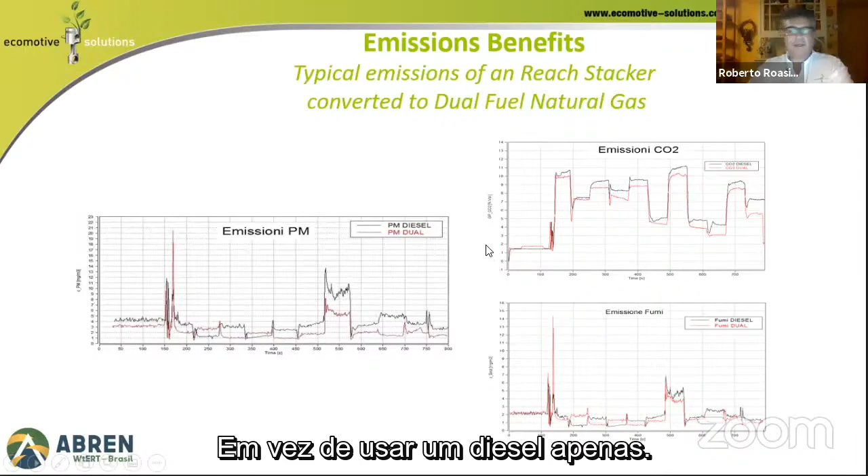And we analyzed some results. You can see here that in black you have the diesel pollution, and in red the dual fuel pollution. There is always a benefit to using this mixture instead of just diesel.

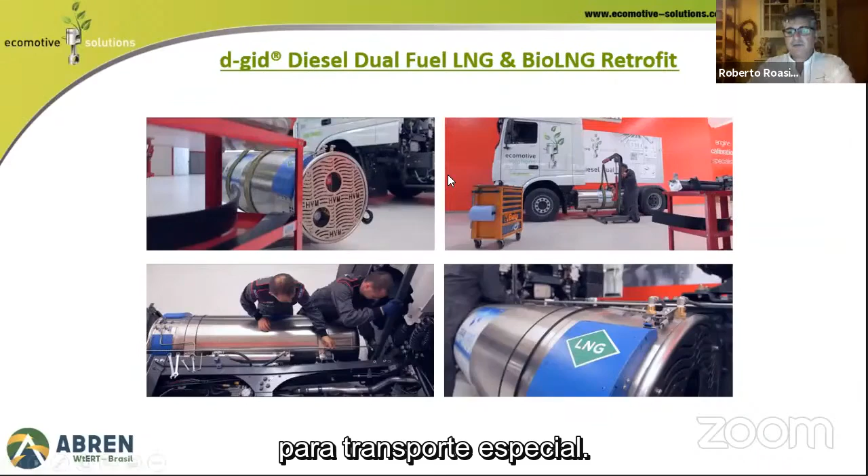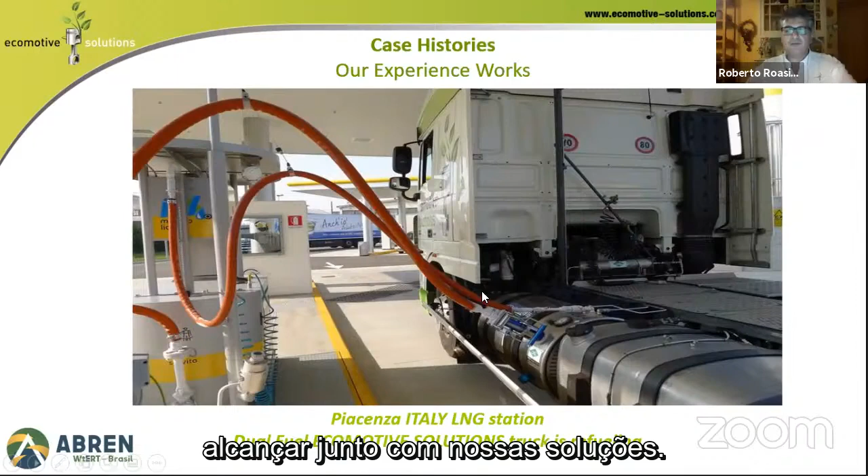So all these are examples of systems we already converted, and you can see there are many operations we can achieve together with our solutions. We can, for example, work on existing fleets of trucks to convert them to dual fuel. We already worked, for example, in Santo Domingo for the fleet of Coca-Cola, with CNG. We are tier 1 with KAMAZ, with more than 2,000 converted trucks in Russia. Also for Iveco, we are working in Russia.

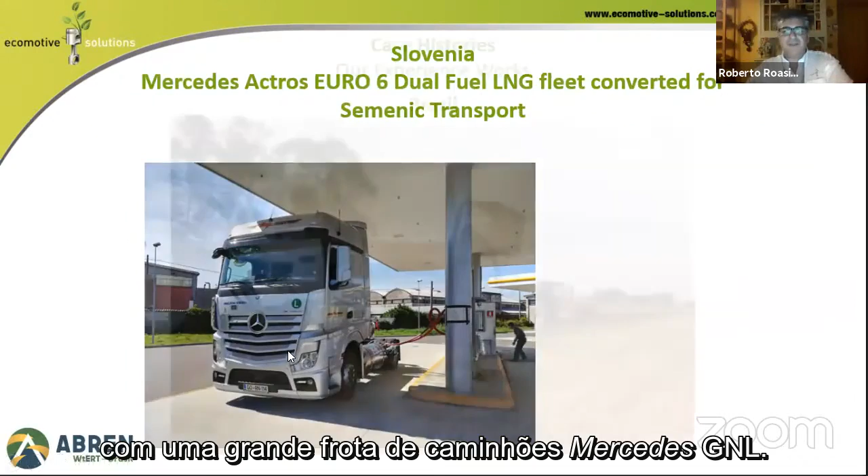Then we are working in Mexico on fleets, in Slovenia for a big fleet of Mercedes LNG trucks, and in Brazil we already did some experiments with CNG. We have buses in South Africa, also in Mexico, and now buses in Brazil, long-haul converted to natural gas. We are also working for a municipality that needs small vehicles for rubbish collection, and also sweepers and so on. All these vehicles I'm showing you are converted to dual fuel with the use of natural gas.

Of course, the same engine can easily work with bio-natural gas, because natural gas and bio-natural gas are exactly the same quality product for us. We also had a challenge in 2018: we converted a pickup truck and drove it 40,000 kilometers in 4 months, crossing from Italy to China and back, all in dual fuel, always able to refuel natural gas in the tank. This was a really fine challenge.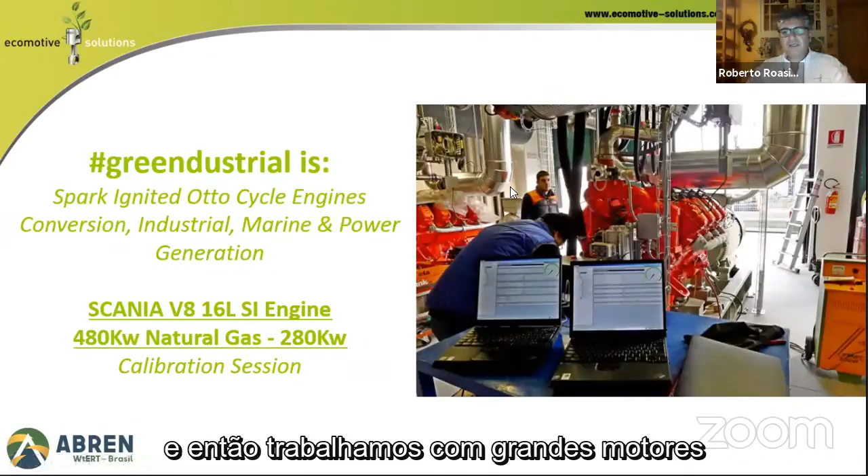And then, as I told you, we also produce engines, full gas engines, starting from a diesel-based block. For example, we are the official producer of a Isuzu engine, small engines used for refrigeration systems. We are also working with big engines for cogeneration systems, all in dual fuel or dedicated natural gas. So natural gas is a flexible solution.

It is very fine when we use bio-natural gas instead, because of the pollution reduction and better results for environmental protection. So I hope this technology, which we designed and developed many years ago, will still be interesting, especially in markets where the business of bio-natural gas is starting right now. We hope to come back soon to Brazil and have a new adventure.

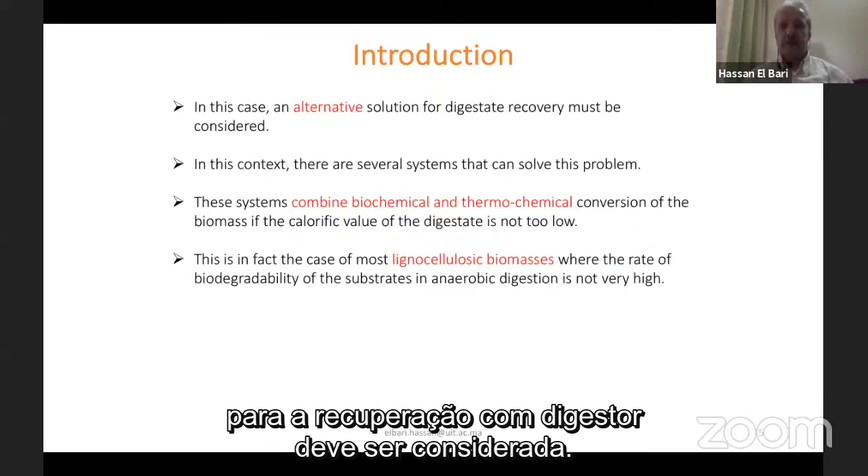In this case, alternative solutions to digestate recovery must be considered. In this context, there are several systems that can solve this problem. These systems combine biochemical and thermochemical conversion of the biomass if the calorific value of the digestate is not too low. This is the case of most lignocellulosic biomasses, where the rate of biodegradability of the substrate in anaerobic digestion is not very high. Some examples of bioenergy technology could be used in combined form to close the loop and achieve the circular economy objective: gasification, pyrolysis combined with anaerobic digestion to produce heat, electricity, and fuel.

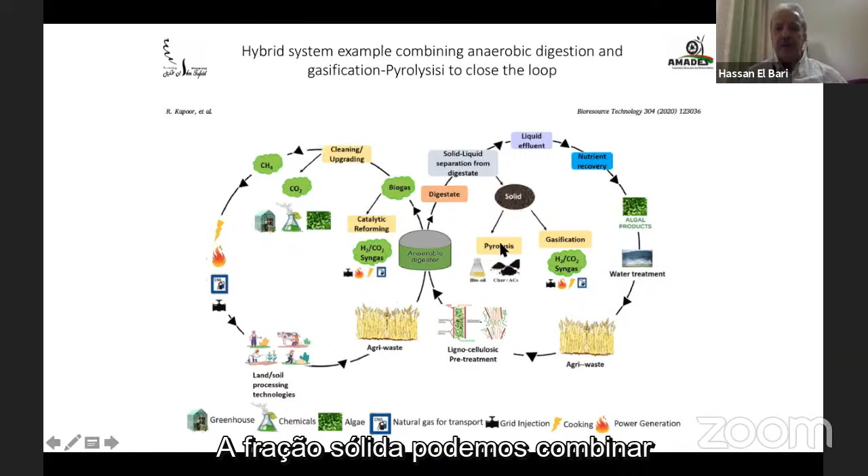An example of coupling and combining thermochemical and biochemical biomass conversion: when we produce the biogas, cleaning up CO2 and methane, we can make separation of digestate into liquid and solid fractions. The liquid one could be used with algae production for water treatment, and for the solid fraction we can combine pyrolysis or gasification to produce syngas. This is a way to close the loop in order to achieve the circular economy objective.

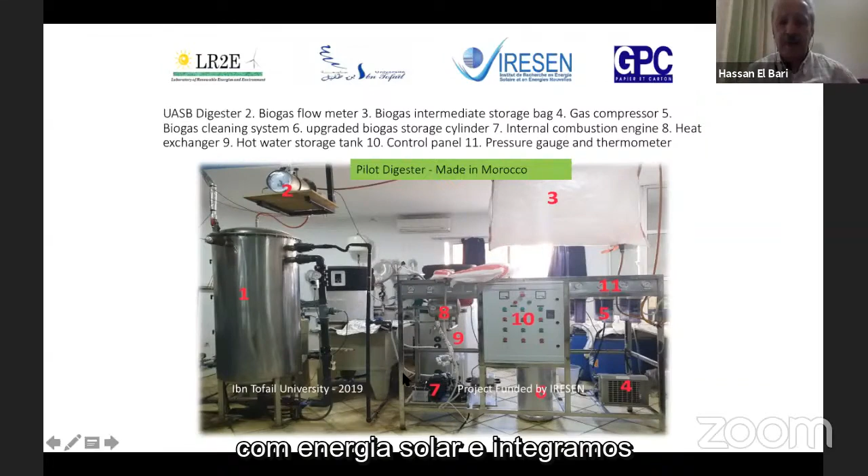Let us see the role of anaerobic digestion and biogas in circular economy. In the future, bioeconomy waste will be transformed into high-value products and chemical building blocks, fuel, power, and heating. Biogas facilities will play a vital role in this development and the implementation of novel production paths that arise in the transition to the bioeconomy. The flexibility of anaerobic digestion systems and their ability to digest a multitude of organic feedstocks while producing a significant range of products ensures the role of AD and biogas in the circular economy.

There are three circular economy areas which are linked: waste management, consumer demand behavior, and supply from economic stakeholders. The current concern of scientists is the basis of the circular economy and the optimization of the value of material flows.

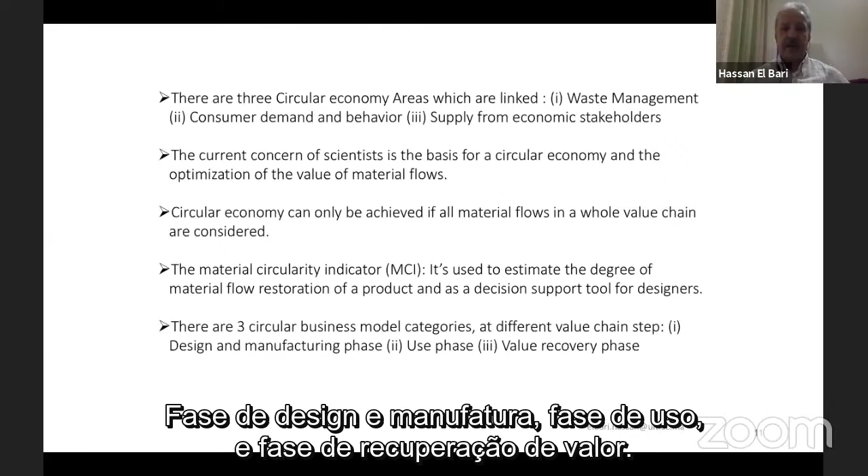Circular economy can only be achieved if all material flows in the whole value chain are considered. The material circularity indicator is used to estimate the degree of material flow restoration of a product and serves as a decision support tool for designers. There are three circular business model categories at different value chain steps: design and manufacturing phase, use phase, and value recovery phase.

It's crucial to integrate all suitable waste-to-energy technologies in the waste management system to achieve circular economy objectives. Policymakers and the public can be made more aware of the importance of circular economy through different life cycle approaches, such as LCA and others. The achievement of circular economy objectives through sustainable biogas recovery will be done through combining systems, such as coupling anaerobic digestion with gasification for enhancing energy and material recovery, combining anaerobic digestion with gasification for electricity and biochar recovery, and the concept of using AD and hydrothermal carbonization, or integrated anaerobic digestion and pyrolysis.

Let us see now what the main obstacles to develop biogas technology in Africa are, or need to overcome. In order to promote biogas technology in a given country or region, it's necessary to be aware of the main obstacles that hinder the development of biogas as a renewable energy source. What are the types of obstacles and barriers that can be considered?

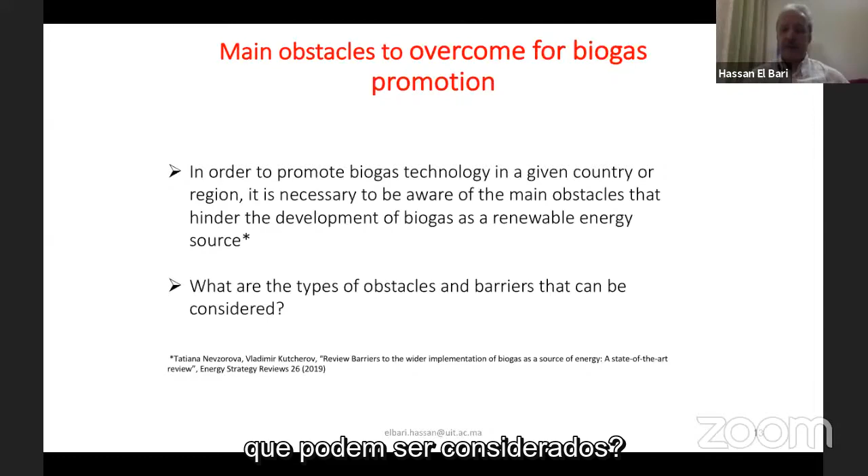We can summarize six types of obstacles: first, technical obstacles, then economic obstacles, market obstacles.

Institutional obstacles, socio-cultural obstacles, and environmental obstacles. Regarding institutional obstacles, the most significant one is the lack of a biogas national program. Significant government support for the biogas industry is therefore necessary and very useful.

Concerning the technical obstacles, these generally depend on the degree of development of the country: lack of adequate local technology suitable, and lack of qualified local technical competence.

Economic obstacles: biogas production units are characterized by very high initial investment. Biogas used as biofuel, with purification processes into biomethane, also needs high investment. There is unavailability of government subsidies and low interest rate bank loans, with only few bank loan opportunities. The growth rate of different African countries depends on the level of availability.

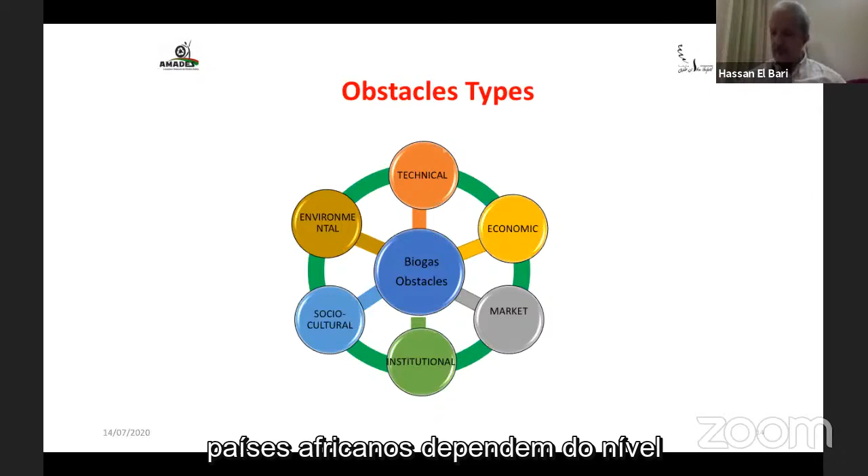Thus, there is variable economic growth in the biogas market in the Middle East and Africa. Concerning market obstacles, the price of biogas produced significantly exceeds the wholesale price. Biogas needs to be competitive in terms of price compared to other fuels. However, the use of biomethane as fuel, or its injection into the natural gas grid, could overcome these price obstacles.

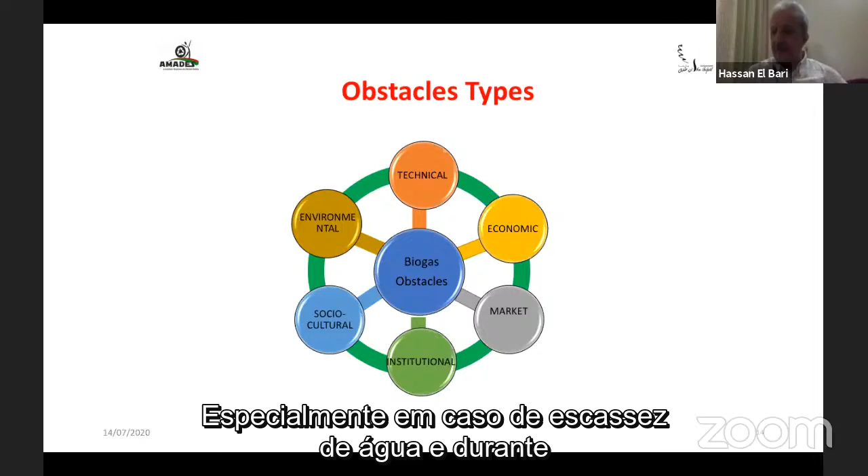We still need subsidies like European countries have. Environmental obstacles: the main one is certainly the large amount of water needed for anaerobic digestion processes, especially in case of water scarcity and during the summer period. Other minor environmental problems might exist, such as noise pollution or other issues from the biogas plant.

Finally, the socio-cultural obstacles: low citizen participation and lack of consumer interest are the main socio-cultural obstacles. Social and cultural factors are not taken into account in the system design. There is a lack of effective communication with potential biogas users about the benefits, appropriate use, and awareness of the biotechnology.

So for Africa, the opportunities concerning biogas technology could contribute mainly to reducing pollution, increasing life expectancy, reducing firewood collection, increasing literacy, creating new jobs, increasing food production, and improving public health in rural areas.

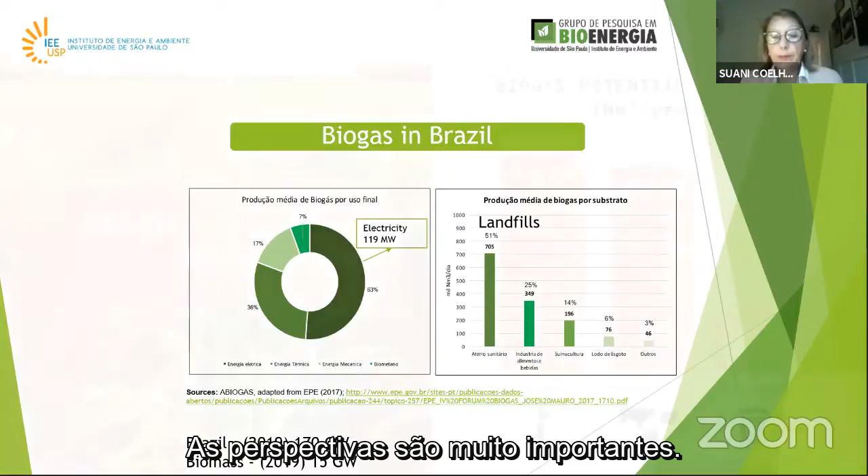The total installed power in Brazil is more than 1,000 times bigger. And only biomass in the electric matrix is 15 gigawatts. So around 100 megawatts is not that much. But anyhow, it's something that is increasing, and perspectives are very important. We have some figures from Abiogás, the Brazilian Association of Biogas and Biomethane, showing that we have large potentials, mainly using biogas from sugar ethanol plants. And I'm going to give some examples on that already existing in the state of São Paulo.

Well, as I said, most of biogas in Brazil is used for electricity. We have here the largest thermoelectric power plant in the state of São Paulo, Termoverde Caieiras, with almost 30 megawatts. And this is, for us, a very interesting project, not only because it's the largest one in Brazil, but because we have been very much involved with them in the early stage. Almost 15 years ago, we developed together with them a small plant of only 200 kilowatts using biogas from the landfills. It was a project funded by the federal government.

And Caieiras was the landfill who accepted us to install and develop this project. And then we realized that they liked the results very much, because later on they decided to improve it. And from the 200 kilowatt project, now we have a 30 megawatt project. So it's a very important project in the country.

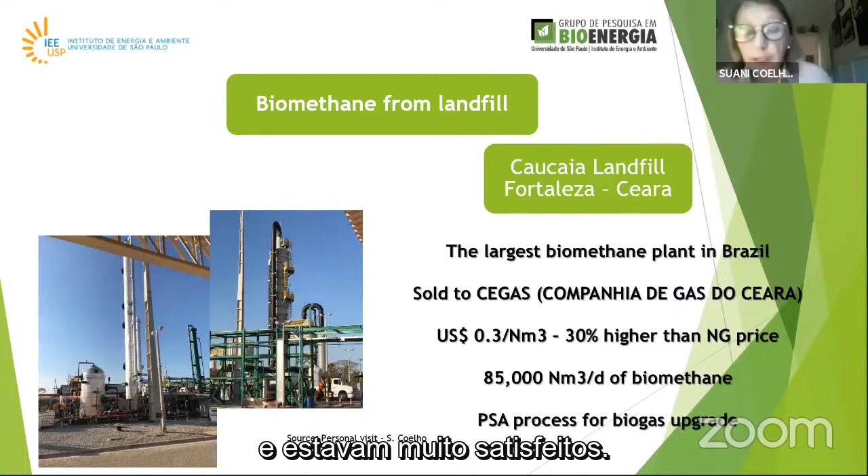So Cegás buys a lot of natural gas from Petrobras, but they also buy all this biomethane from the landfill with this 30% higher price as a premium for being a renewable gas. And the process that they use for the biogas upgrade is PSA, which, when I visited and discussed it with them, they consider very interesting. They are very satisfied with it, and even consider a large scale project.

Bonfim Mill is one of the large mills belonging to Raízen Group, and they are now developing a biogas project of 20 megawatts to be installed in the mill using vinasse from the ethanol production together with other residues. As you know, in Brazil, almost every ethanol production mill uses vinasse for irrigation and fertilization of the sugarcane field. But we can also produce biogas from vinasse and couple this with the irrigation as well.

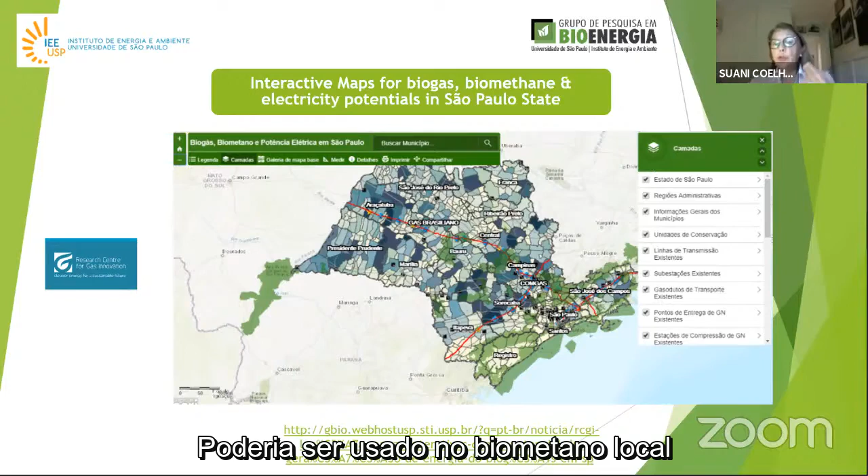And the results obtained are impressive, very huge amounts that we could use for different purposes. The most important is that in some areas where we do not have the pipelines to inject in the grid, we can use it for a local dedicated fleet in the municipalities, as in the case of Cocal Mill. And this is an experience that I consider very interesting, because we can replicate it in other areas of Brazil. In the Center-West, for instance, where we do not have distribution of natural gas, we could use the local biomethane produced from animal, rural or urban residues, it doesn't matter, and distribute it with dedicated pipelines.

So you have the link. You can download the maps and interact and play as you want to get the results.

In fact, if we compare, for instance, just the Ribeirão Preto region, which is the most important sugarcane region in São Paulo state, the amount of biogas produced only from vinasse, without using filter cake or straw, we can have important production compared with the consumption of municipalities. Here you see, for instance, that in Sertãozinho, which is a very important and very large municipality, we could produce around half of the total amount of fossil fuels used.

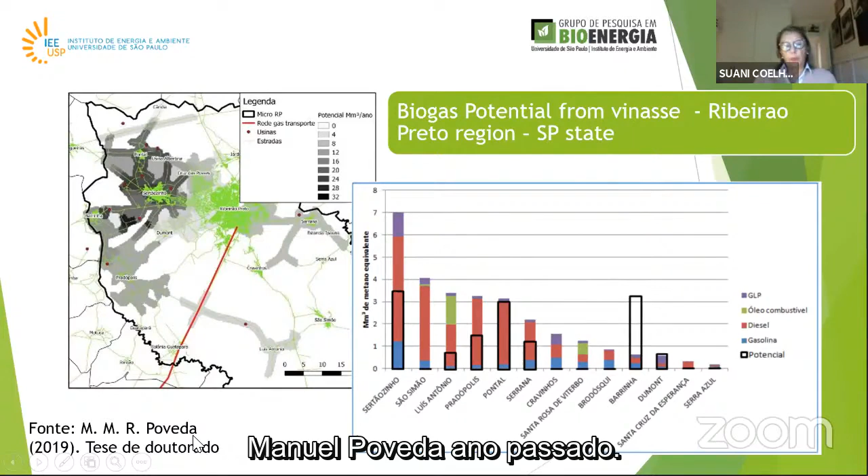Or, for instance, in Barrinha, which is a small municipality but with a large potential, we could have much more biomethane being produced than the amount consumed in the municipality, so with an important option to be exported. So here you have, just to illustrate, a comparison of the potential in each municipality with the consumption. This was part of the PhD thesis of one of my students, Manuel Poveda, last year.

And of course, we can couple all this with the carbon balance and with the perspective of doing carbon capture in ethanol plants.

It was mentioned by Hugo. I loved your presentation. I loved the picture that you showed capturing CO2 from the atmosphere. If you allow me, I'm going to use it in my classes.

But anyhow, in the case of Brazilian ethanol, as you know, we do not have any fossil fuel in the industrial plant because all the boilers are fed with sugarcane bagasse.

So if we are able to capture the carbon from the flue gas, from the fermentation, and also from the biogas upgrading, we could have important perspectives for a better carbon balance. And even if we do this bioenergy together with carbon capture and storage or carbon capture and use, as was mentioned by you before, we could have an important reduction on the carbon footprint of Brazilian ethanol.

And these are subjects of a new project that we are developing and preparing now in the Research Center for Gas Innovation, including the relation of this process of carbon capture in ethanol plants with the RenovaBio program. As you are probably aware, the RenovaBio program is a new program of carbon credits approved by the federal government and already in place, where the distributors of gasoline and other fossil fuels have to buy carbon credits from biofuels producers, bioethanol, biogas, biodiesel, to reduce their carbon footprint.